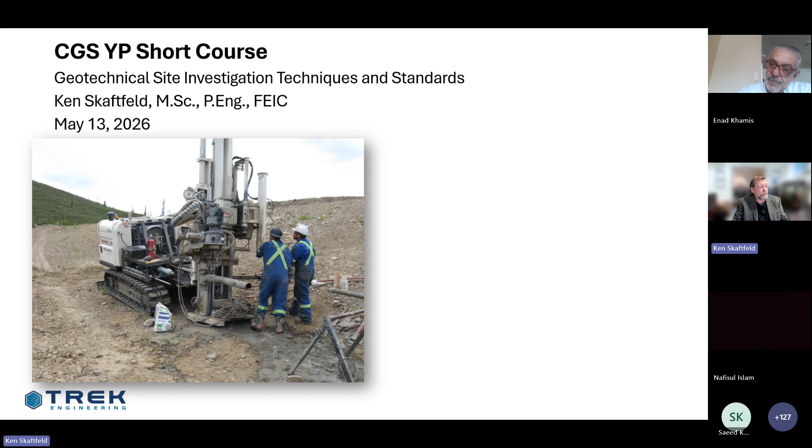Geotechnical site investigation techniques and standards. I'm not going to talk a lot about standards. We don't necessarily have a standard per se or a code that we follow in Canada, but we'll touch on some of the other codes that are applicable in terms of setting up a site investigation.

One important tool in your toolkit for a site investigation is a thermos with coffee, and then you always need an office chair. This is a picture taken somewhere in the high Arctic several years ago. The picture on the left is a sonic drill at a project up in the Yukon. And now my dad joke—I'll give you a chance to read that.

And I promise that's the last dad joke. There are no more.

So what is a site investigation? Really, it's an assessment of the engineering and physical properties of soil, rock, and let's not forget groundwater, because that's a super important part of a site investigation and design and construction for sure.

This is at a proposed construction site, or it could be a site where problems have impacted constructed works. An example would be the diversion channel that runs from the Assiniboine River to Lake Manitoba, where there was a lot of flood damage to some of the bridges. So this is an investigation that is being carried out.

This happens to be a track-mounted auger rig. We did the work to look at conditions relative to exposing the footing, or the pile cap I should say. You can see the steel H piles below the pile cap. We extended the pile cap down with concrete and then armored it. In some cases, additional piles were added to some of these bridges.

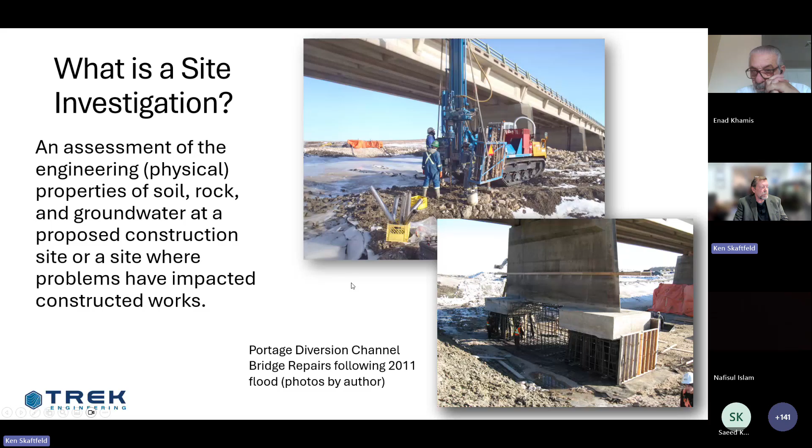So this is an example of a problem that has impacted constructed works. The general purpose really is to obtain geotechnical data or groundwater data on soil and rock strength, compressibility, permeability. Those are maybe some of the more important ones, but there's others.

We want to identify the presence of potential hazards such as landslides, expansive soils, etc. This is not a site investigation, but it's a picture of an unexploded ordnance and somebody sneaking up on this person in this picture. Sorry, that's my dad joke number 2.

So that is definitely going to be it. The primary purpose is to systematically assess, and systematically is an important term. You'll see further on, we want to get as much of a systematic process as possible.

So that's to assess subsurface conditions and guide us as to how we expect the ground to respond. And that would be the response under loading. Don't forget about unloading - rebound is something to think about in that particular case.

Environmental effects - there's numerous environmental effects that could include wetting, drying, especially in our region, and where Chelsea is in Saskatchewan, we have expansive clays. Then we also deal with freeze thaw in this part of the prairies.

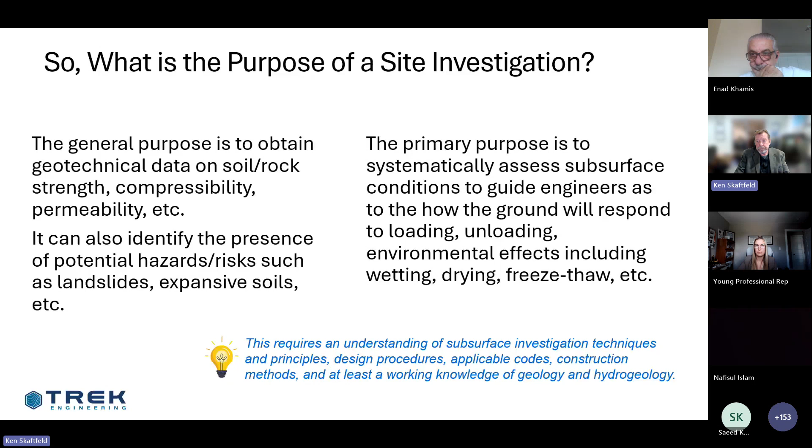So there are 2 basic approaches to collect data for design. This is a reference I've just shown here, the geotechnical investigation handbook, and it's also got a lot of design tables in it. So I'll leave that for you.

Some may have this on their shelf. The traditional approach to geotechnical site investigation is to consider ground conditions as a design element based on a structure or development design, or maybe a layout that's been given to you. So somebody says, this is what I want to build, and then you're going to plan your approach based on what's being built. That's probably the more common approach.

Having said that, and I'm not sure I like the term non-traditional, but it probably is in some respects, where we might want to plan the structure and development around the ground conditions. And so the ground conditions would be a design input, and the design is based on those conditions - that's maybe less common.

There's 3 basic steps involved in a site investigation, and there's obviously more steps, but this is what I consider perhaps to be the basic steps. You've got to determine the level of information required. In other words, what does this investigation look like?

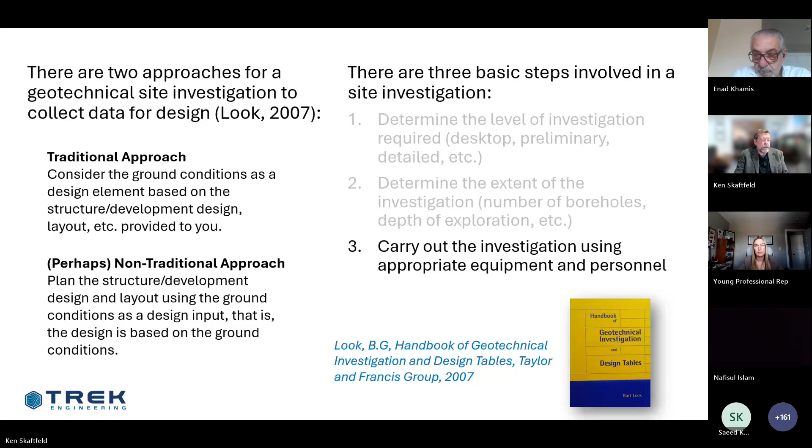Once you've gone through steps 1 and 2, you should have some idea of what the right equipment is. Like if you've got wet sand, drilling through 40 feet of wet sand, you're probably not going to have an auger rig, and so on. So you want to make sure you have the right equipment and also the right personnel.

So a fundamental consideration is what are the geotechnical design issues and what are the questions? Ask yourself, what are the loads? It's not unusual for us to ask a structural engineer, if they're looking for a geotechnical investigation for a building or a bridge, what are the ballpark loads on the foundations. We need to have some understanding of ultimate limit state and SLS values.

Long span length equals large loads. Quite often there's a lot of discussion relative to shorter spans versus longer spans, and the impact that will have on foundation loading. And therefore, that sometimes drives the type of investigation that's needed. Do we need to get into bedrock and this sort of thing?

Are there slope stability concerns? I would think in this picture, the answer is pretty obvious. Are retaining walls needed? Quite often there's geometric constraints that prevent the use of just earth embankments with 4 or 5 to 1 side slopes. This is an MSE wall in Saskatoon.

Will fill be placed for an approach embankment? If fill is being placed, what are the settlement tolerances? The reason I'm showing you this is so you start thinking, well, okay, if there's really strict settlement tolerances, you better get your investigation to look at the type of soils, the compressibility of the soils, and so on, and plan your lab testing program around that.

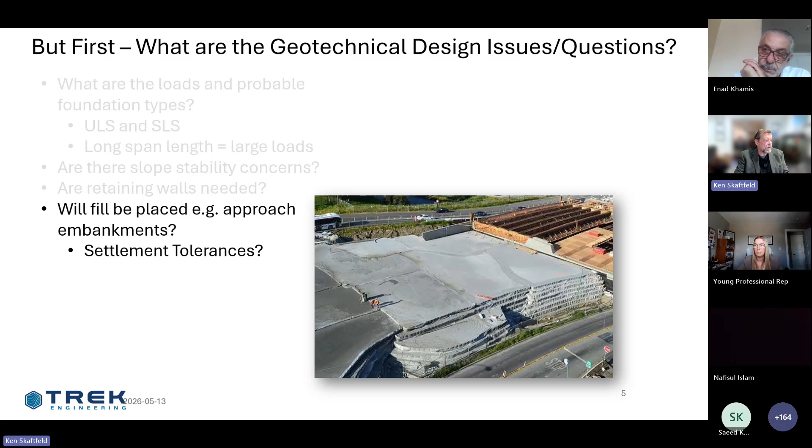Is there pile down drag? In a lot of cases, when there's an embankment and it's a short time frame to construction, quite often there's down drag loads on the piles that has to be accounted for. There may be frost heave, and don't forget groundwater. That's my main take-home message for today.

Don't forget groundwater. So what's the importance, in my mind, of a good site investigation? Almost everything, like all foundation elements and a lot of utilities, most utilities, lie in or on the ground. So we need to find something out about the ground.

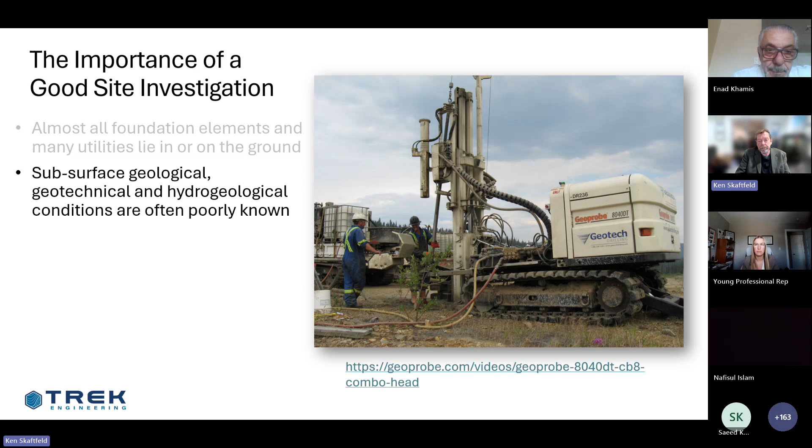Quite often, geological, geotechnical, hydrogeological conditions are often poorly known. We may not really have any information to go on. Sometimes we have some information. A very important step in all this is to obtain as much information ahead of time as you can when you're planning a site investigation.

Unknown or poorly known subsurface conditions represent the largest technical risk, and I can assure you, if it becomes a technical risk, there's probably a financial risk associated with that relative to claims and so forth. So that's what we deal with. An inadequate subsurface investigation is quite often the cause of a large claim or a large delay. If there's a large delay associated, say, with changed ground conditions, I can almost assure you it'll be followed by a rather large claim.

So what are the realities we work with? We deal with complex geological conditions that are hard to understand sometimes, difficult, challenging to model. There's quite often a complex response to loading or unloading, and that generally will depend on the stress level. In other words, how deep. We quite often have stress strain behavior that might not be linear, for instance, in a normally consolidated clay versus an over consolidated clay.

So these are the challenges that we're faced with. And then we need to look at the stress range that we're working with, the loads and so on.

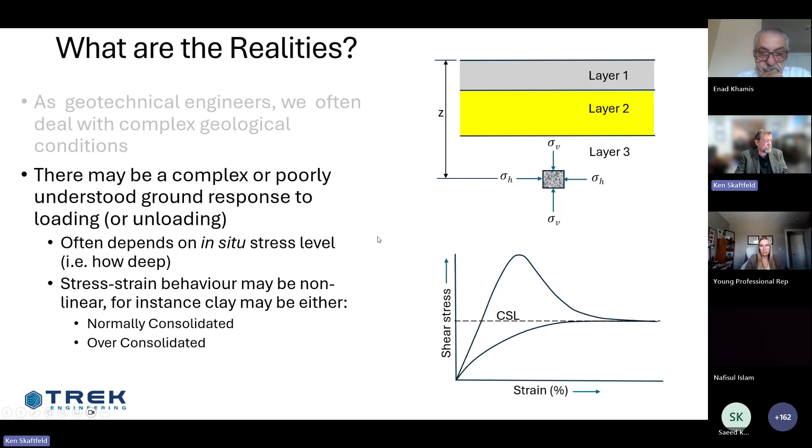Probably one of the first things to look at really closely is the classification of soil and rock. That's a really fundamental objective of a site investigation, is you've got to classify the soil and rock. To do this, you need to have a good understanding of soil and rock. And the Canadian Foundation Engineering Manual, the 5th edition, has adopted entirely the Unified Soil Classification System, or USCS, as outlined in the following 2 standards.

CFEM is not a code. It's a guideline document, but the USCS follows standards. The first one being ASTM D2487, and that's the standard practice for classification using USCS, and 2488 is the visual manual method.

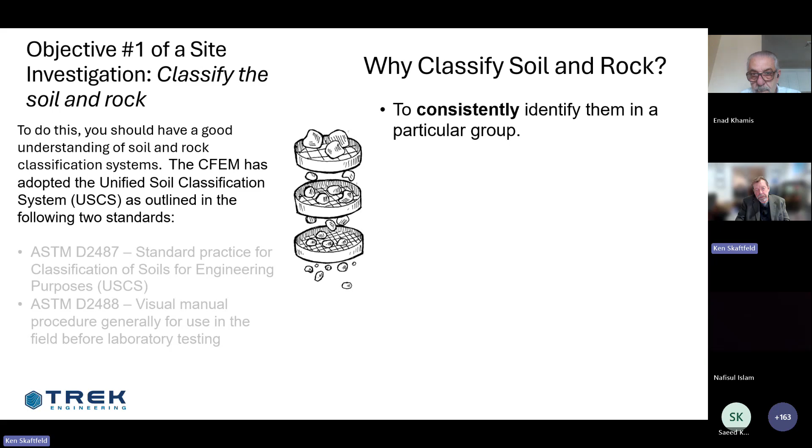Now, I'm sure most of you are aware of this, but just as a reminder, why would we classify soil and rock? To consistently identify them in a particular group, and we can all basically understand the same language if we do that. We want to specify a particular soil for an engineering application. Maybe you've got a liner and you need a highly plastic clay, so it's a CH, a well-graded gravel, GW for road, and so on.

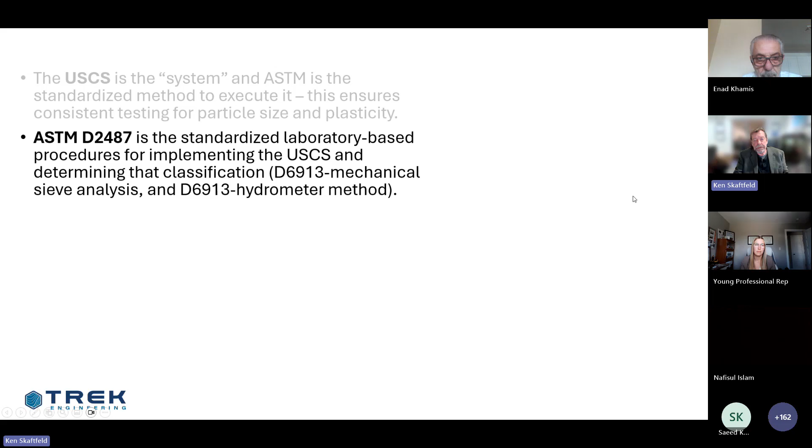Just to clarify one thing on USCS, that is the system. ASTM is the standard method to execute it, so the standards are part of ASTM. D2487 is one standardized procedure, which includes mechanical sieve and hydrometer analysis, and this gives us consistent testing to classify based on grain size and plasticity. 2488 is the visual manual method.

This relies on manual tests in the field, more for the field, right? So this is part of your site investigation, and we record those classifications on field logs as a preliminary assessment. Quite often that's followed up by lab testing in accordance with ASTM. So a site investigation should consider the testing requirements needed to properly classify the soil. That's changed a little over the years, but you should be aware of what sampling and testing is needed when laying out the program and identifying the laboratory testing program.

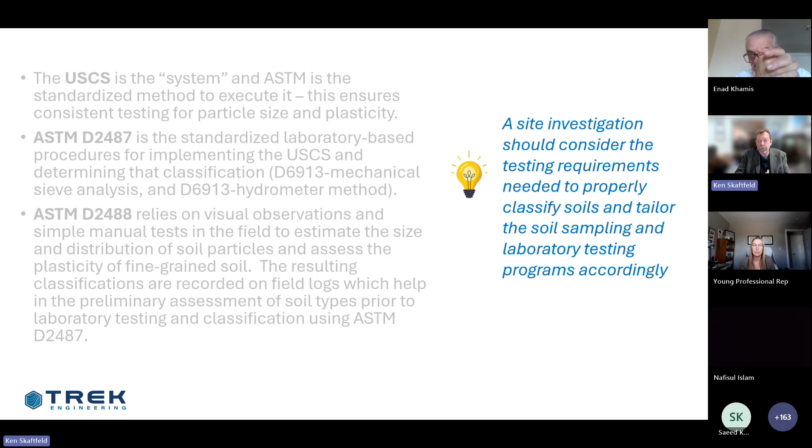I'm not going to spend a lot of time talking about rocks other than to say, if you're dealing with bedrock, rock needs to be classified. This is pretty basic stuff. We've got igneous rock, we've got sedimentary rock, and we've got metamorphic rock.

Some people attending today have a geological background. So I'm just going to say, if I have my toolbox and I need to look at some rock more closely, chances are I'm going to bring some back for a more complete classification.

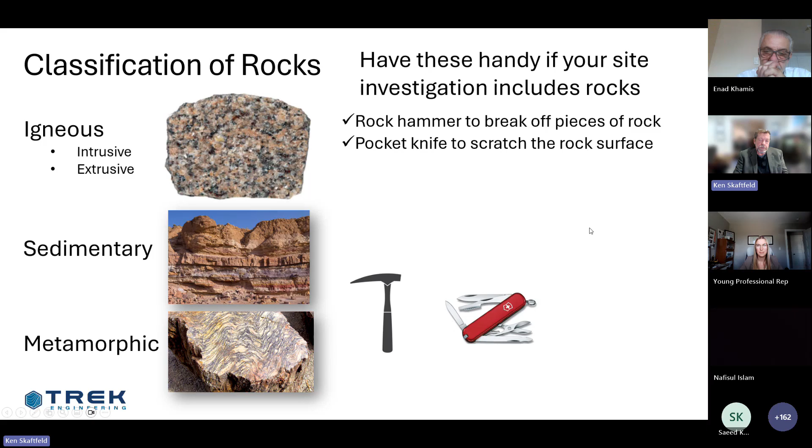But you'd want to have a rock hammer, to break off a piece of rock, a pocket knife to scratch the surface—this goes to the Mohs hardness scale—a hand lens to look at the crystal, just to see whether it's coarse or fine grained, a dropper bottle with diluted hydrochloric acid to test for carbonates, and a paintbrush. It's always good to wet the rock sample if you want a better look at it.

Objective 2: determine the physical properties. This will help assess the suitability of the soil or rock for construction. This is how I like to look at soil: we have index properties, which are specific gravity, water content or moisture content, particle size, density, plasticity. Then we have engineering properties: permeability, shear strength, and compressibility. Those, in my mind, are the engineering properties.

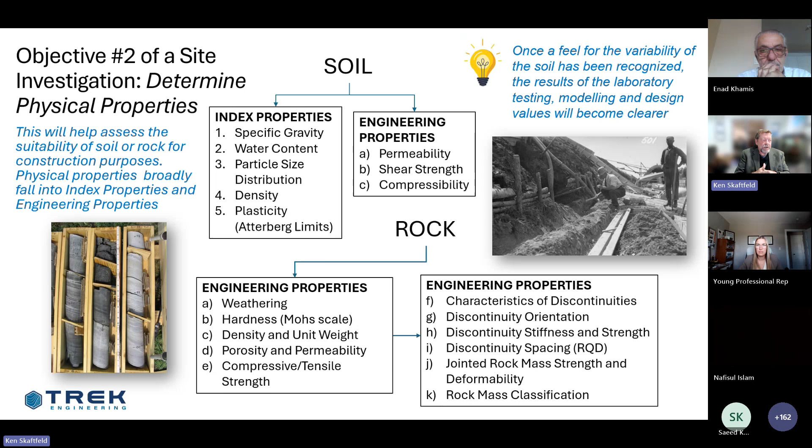Rock mostly just has a bunch of engineering properties, and you're going to hear more about this in another presentation, so I don't want to spend a lot of time, but weathering and joint discontinuities and so on. Once you have a feel for the variability of the soil, then the results of the laboratory testing, modeling, and design values should become clear to you.

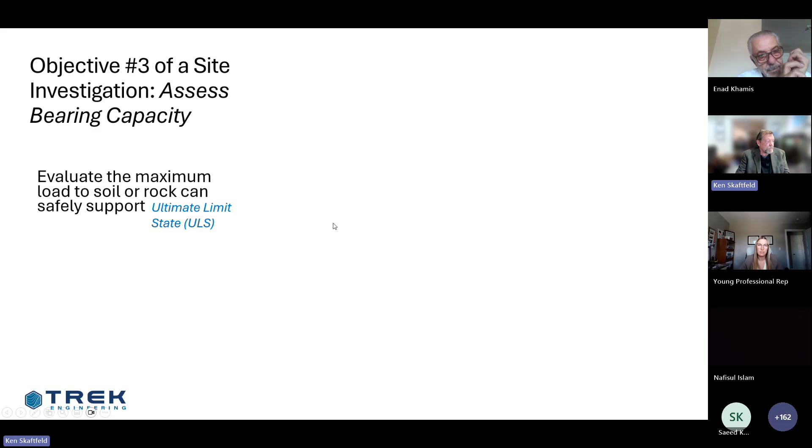Objective 3: assess bearing capacity. Evaluate the maximum load a soil or rock can safely support—that's the ultimate limit state. And also without excessive deformation, informing about the type and size of foundation units, which is the serviceability limit state. I don't want to get bogged down in limit states design here, but just a few things.

When we look at a footing, as the footing width increases, the behavior in both SLS and ULS limit states changes, right? So quite often we look at different footing widths and try to find a balance between strength and serviceability as much as possible. Sometimes we start with a footing size based on serviceability, especially in really soft or loose soil, because generally speaking, once serviceability criteria have been met, ULS requirements are probably satisfied.

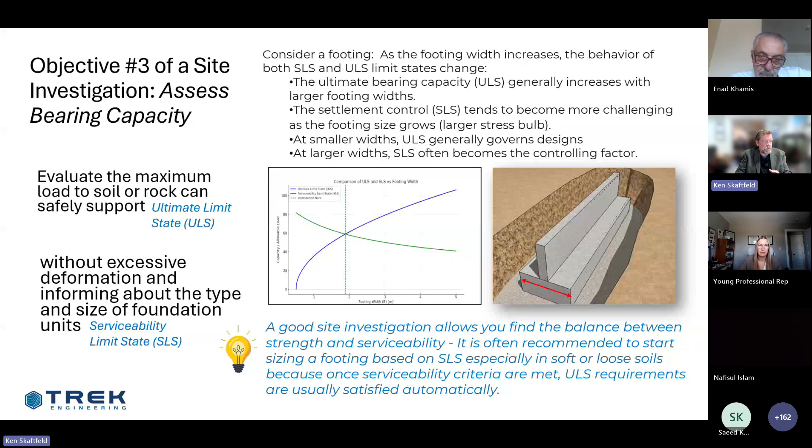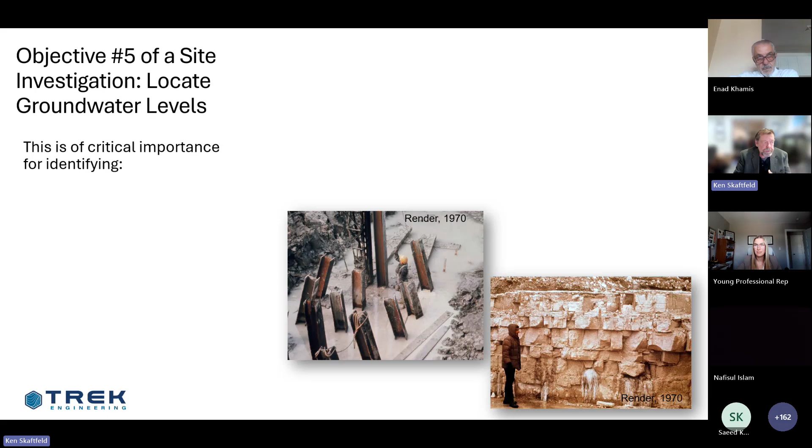Objective 5 would be locate groundwater levels. This is of critical importance in order that you can get the information that you need to look at dewatering strategies. And that might be like here's showing a shored excavation sheet pile. Top left picture is a sheet pile supported excavation. There's a pump, there's dewatering going on, and so on. Sometimes dewatering wells are installed outside of the excavation to lower the groundwater levels and so on.

This is a picture from one of the floodway bridges built back in the 1960s, just outside, just east of the city here in Winnipeg. And Frank Render, who was our groundwater guru for many, many years, Frank passed away. But this shows an excavation for a pile cap, steel H piles. This is not like surface water going into the excavation. This is groundwater that's coming up around the piles. There was very little clay left. The piles went down into till, which is common here, and all kinds of groundwater seepage into the excavation.

So this is another excavation on the south end of town, just showing what the rock looks like, the jointing and so on. This is a limestone bedrock, and these are some of the challenges that we're faced with. So it's also really important identifying groundwater levels for foundation design, assessing buoyancy potential, groundwater contamination. So it is, and by it I mean groundwater, is sure to play a very important role.

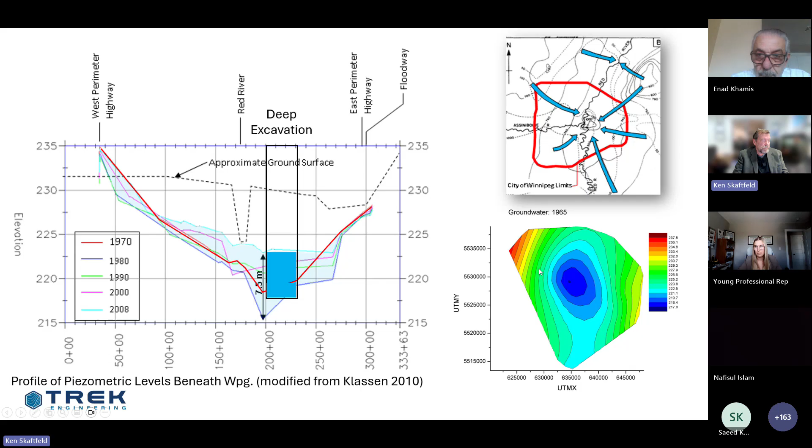If you look at that in terms of, this is work by Klassen in 2010, these are groundwater contours, red being a higher elevation, blue being the drawdown cone right here. That's shown in the blue here. If you look at it in time lapse, you'll see that the dates, it's a little bit faster than I like, but anyway, you can see that blue area just basically disappearing. So you can see kind of the two-dimensional effects.

Objective 6, to guide foundation design. So identify the information necessary to select a cost-effective foundation type. And you want to provide data for the design of the foundation system based on the anticipated loads. And that could be a shallow foundation, deep foundation, raft, and so on. Many different types of foundations.

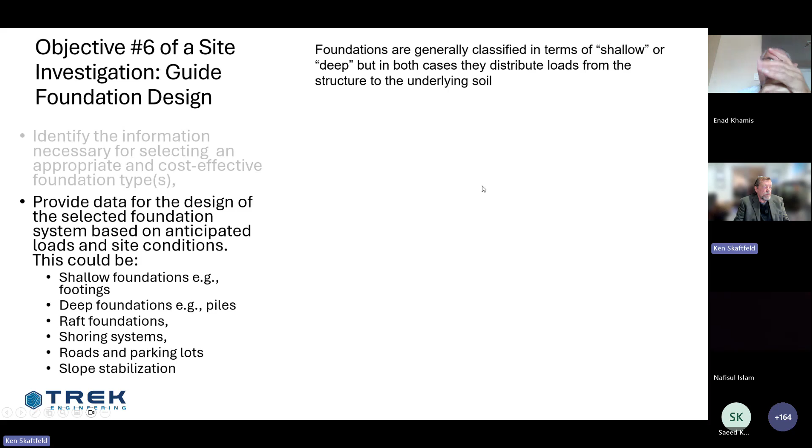We generally classify foundations in terms of either being shallow or deep, but in both cases, they transfer load down onto the soil. Shallow foundations, there's general kind of rules of thumb in terms of what defines a shallow foundation based on the depth and the width. And these are some different types of shallow foundations. Whereas a deep foundation, it's when the depth of the foundation is really large in comparison to the width. Think of it that way. And that could include belled piles, cast in place, concrete piles, driven steel pipe piles in the bottom right.

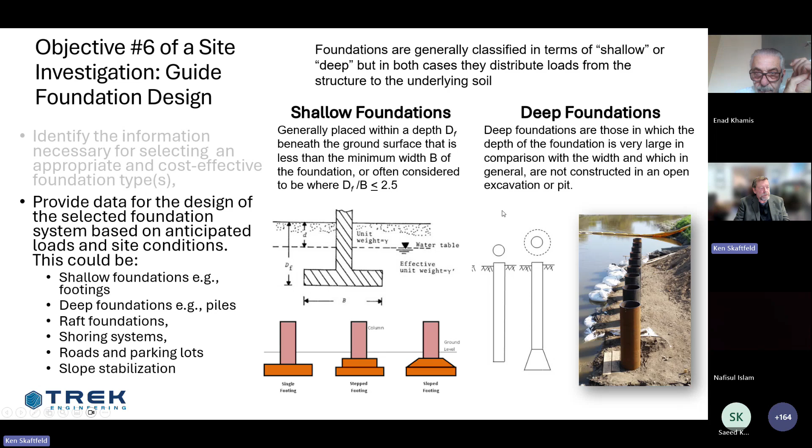Could be an excavation, or a secant or tangent pile wall, which are very similar. In a tangent pile wall, the individual piles just touch each other, whereas in a secant pile wall, they bite into each other. For a site investigation on something like this, you need test holes deep enough to reach refusal or a sufficient depth for design.

You need to know something about the undrained shear strength of the clay for design, unit weight, groundwater level, friction angle if it's granular, modulus values, and so on.

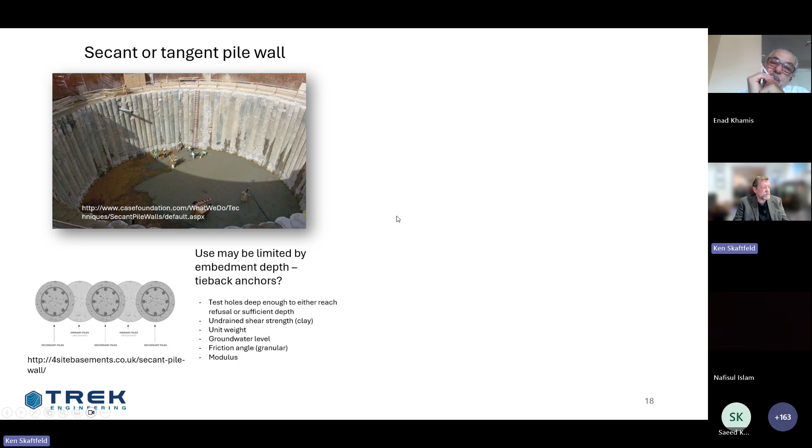Seventh objective: optimize construction methods. We need to look at different excavation types and techniques. You need earth pressure coefficients for retaining structures, and you need to determine safe excavation side slopes, and so on.

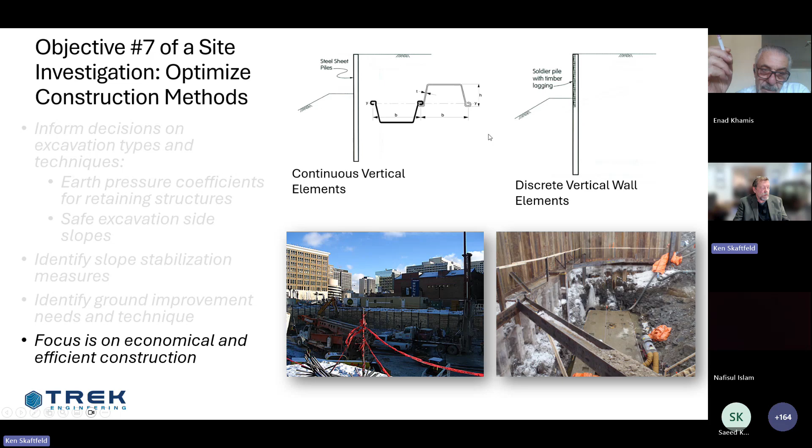This is just a typical soldier pile shoring system in Winnipeg. This is a deep excavation into shale, and you can see the amount of bracing and whatnot that is required. It's a pretty big difference between the two, but nonetheless, you need to obtain the information necessary, in most cases, for the structural engineer to design the system.

You need to ensure regulatory compliance. That might mean providing documentation for local, provincial, and federal building codes. You may need to demonstrate this through an assurance letter or something similar, showing that the project design recommendations are based on sound principles and meet safety standards, for example, in seismic design.

We deal with the National Building Code of Canada, NBCC, which I think everybody would be familiar with. We also deal with the Canadian Highway Bridge Design Code, CHBDC. There are some differences, and I don't want to get bogged down since I think this is coming up in another presentation.

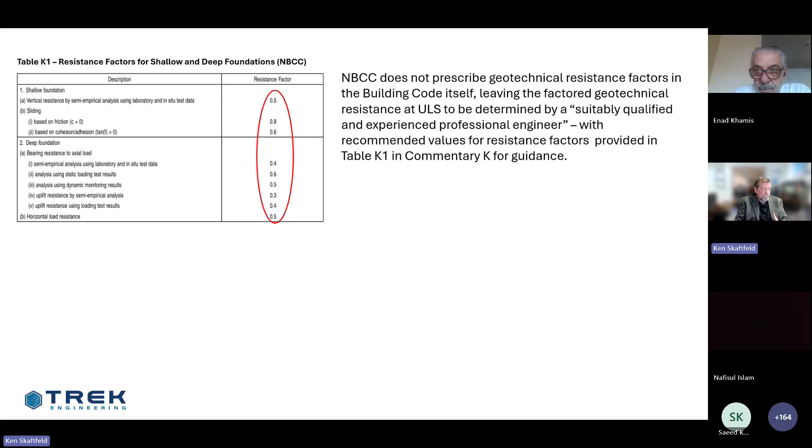So NBCC does not prescribe geotechnical resistance factors in the code itself; that's left up to determination by a suitably qualified engineer. Recommended values are provided in Commentary K, which is linked to the code. CHBDC gives us the ability to pick a resistance factor based on our understanding of conditions.

This is a really important point because the resistance factor accounts for uncertainty, and it depends on the degree of site and prediction model understanding. So if you want a high degree of understanding and take advantage of a higher resistance factor, you better make sure you have the right information. Your site investigation is tailored around that.

There's real economic value in many cases to having a resistance factor that can be adjusted. Sometimes on a job with many piles, it may be worth going the extra step to get that level of understanding that a good site investigation will provide. That could mean static load testing, or Osterberg load testing, or something like that.

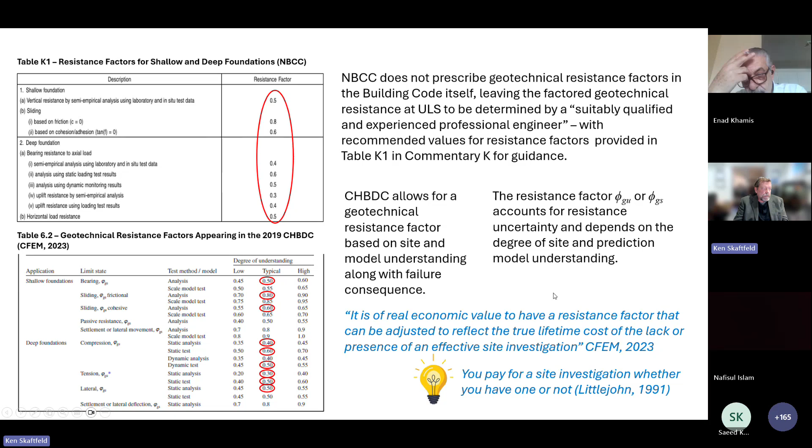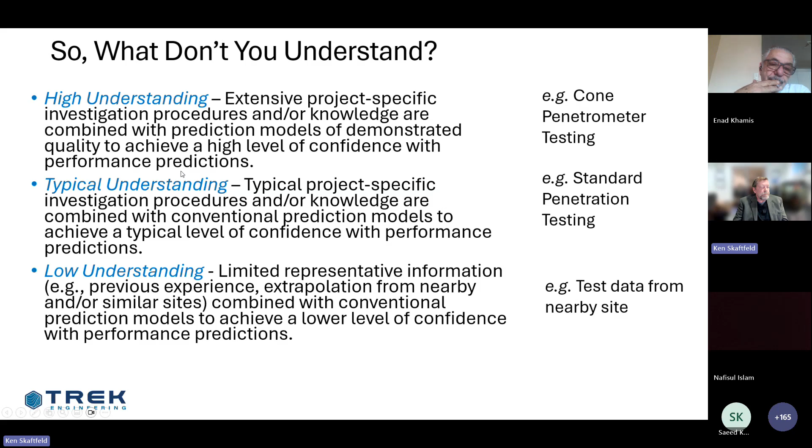Going back to CHBDC, a high understanding might mean CPT testing, and a typical understanding, I'm just throwing this out as an example of what a level of investigation might include. A low understanding might mean you've got a site a block away and you're taking information from that site. So this scales up or down according to your level of understanding, and the resistance factor is tied to this.

So what do you need to know to plan and implement this site investigation? Is it conceptual, feasibility, preliminary, detailed, or design? Sometimes there's a bit of overlap between these. They're not necessarily in a box to themselves.

Sometimes we carry out a detailed investigation, a level sufficient for detailed design, as part of preliminary design, because it's maybe not cost effective to go back in for a second round. Maybe it's a very remote site and expensive to mobilize.

So sometimes these overlap. You've got to ask yourself again about loads and allowable differential settlements. It's not just settlement. So when you're looking at oedometer results and consolidation settlement, it goes way beyond just the settlement magnitude.

You really need to consider what the differential settlement is potentially going to be, what information is available for the site, how many boreholes you need, and where those boreholes will be located, within or outside of the footprint. Sometimes there's a building on the site and you can't get to where you might want to get to, so you have to plan around what's there.

There's physical constraints. What are the sampling requirements, disturbed and undisturbed? Think of undisturbed, and I would put relatively undisturbed samples, that being, say, Shelby tube samples. Should in situ tests be done?

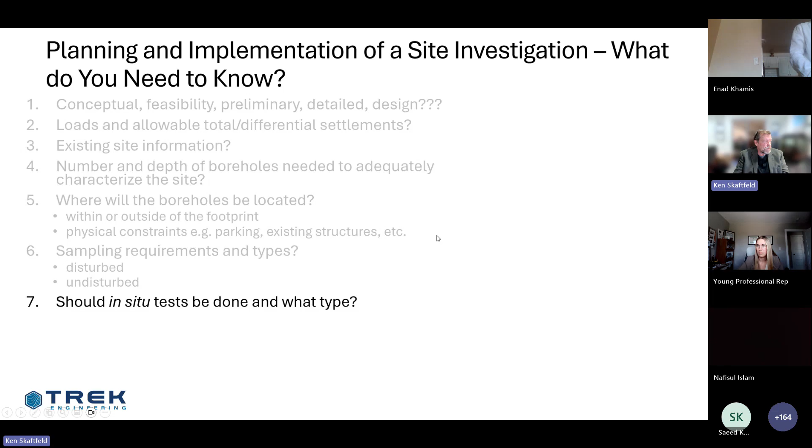Dr. Robertson in the next presentation will be going into a lot more depth on in situ testing. Is instrumentation needed, and what does that look like?

Do you hook it up to a data logger? Do you just go out and do manual readings? How do you protect that during construction? Maybe it's really important to maintain the instrumentation, like an inclinometer casing, during construction - then you better put it somewhere where it's not going to get taken out during construction.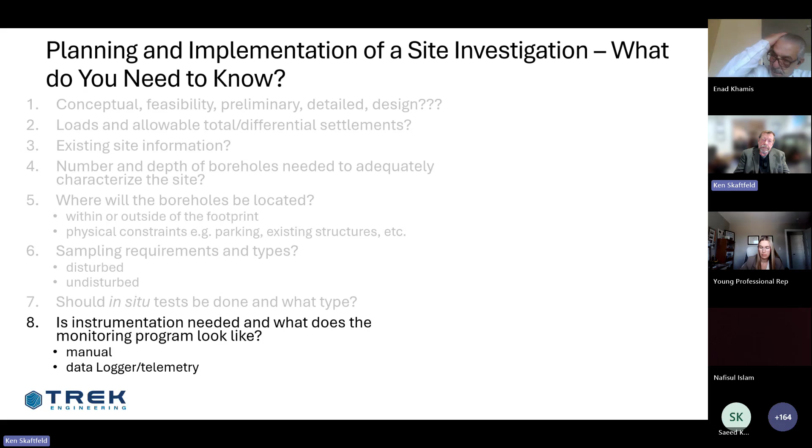So your site investigation should plan around what's being built, and if you've got instrumentation, try and put it in an area and location that's least likely to be damaged or disturbed. So there's a lot of stuff to think about, right?

I put this together, and I'm sure if you threw this out to 10 different geotechnical engineers, you might get different answers - how we seem to all kind of gravitate towards flowcharts.

This is my own flowchart, starting with a preliminary investigation and what that might mean relative to getting to preliminary design. And after preliminary design, do you have sufficient information? Yes or no? If you don't, then you might have to go back around and drill more holes, more test pits, and so on.

So it's just a way to logically think your way through this, right? So we'll go back up to the top. Your preliminary investigation involves collecting some initial information. You'll have a site reconnaissance and public records maybe, and you're going to characterize that, and then get into the preliminary design, which involves drilling and so on.

Along the way, there'll be some technical review, and that's probably going to direct you on one path or the other. So I don't want to get too bogged down in this, other than to say, give some thought as to what the typical investigation should look like relative to the project you're working on, and whether it's preliminary, detailed, or conceptual.

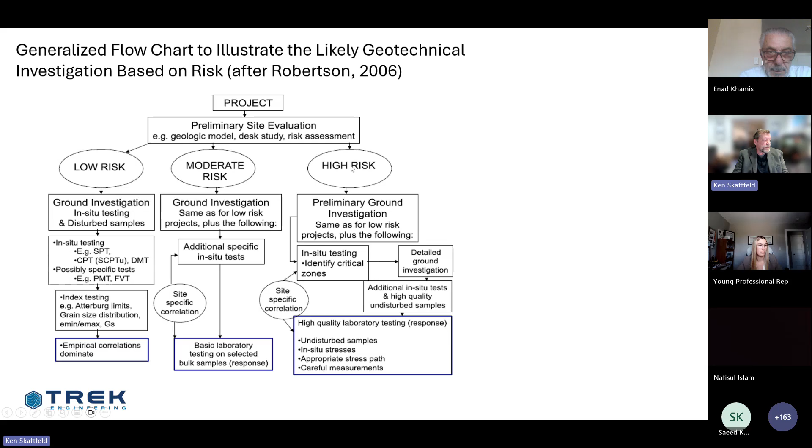This is probably going to be covered - I'm sure I saw it in one of the other presentations - so I don't want to spend a lot of time, other than you should be aware of that. It's also in Chapter 5, Site Investigations, in the Foundation Manual, and the author is Dr. Dave Elwood.

This, I'm not saying you could find, because I might have the only copy. It's a short course on site characterization put on by Wayne Clifton and Dr. Robertson back in, can't make that out, 19-something. So it's a great publication that put together lots of interesting papers, lots of good resource material. If you can get your hands on a copy, I'd suggest you do so.

Geotechnical data and baseline reports - I want to touch on this quickly. A GDR is a data report. There's a GDR, D as in David, and a GBR, B as in Bob, and the GDR represents a general description of conditions and information collected. That's all it is. But more importantly, a geotechnical baseline report - you're going to be hearing about these, you're probably going to run into them, you're probably going to be involved in one.

The intent of a GBR, especially for linear infrastructure like tunnels, is to establish baselines that you can measure that describe the ground conditions and behavior you expect to encounter. A classic example is obstructions in tunneling - cobbles, boulders, that sort of thing. The GBR is really essential for allocating risk and developing scope, and as part of contract administration.

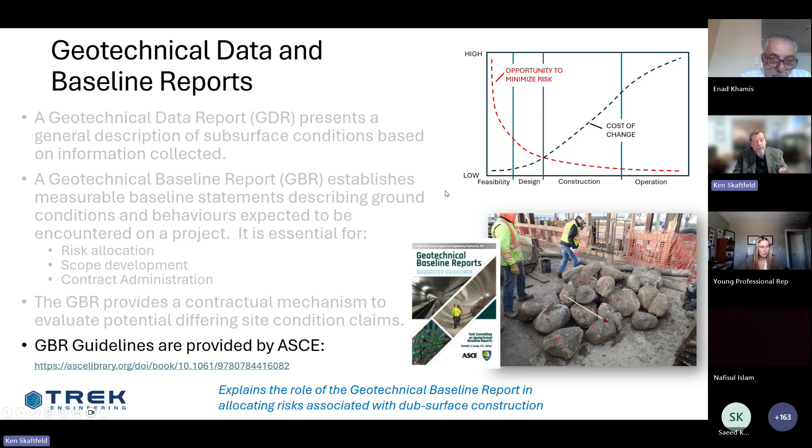There's a picture from a tunneling job showing what tunnel boring machines don't like to run into. There is a document by ASCE on geotechnical baseline reports you might want to be aware of, and that describes basically what I just covered.

Expenditure for a site investigation - the typical expenditure may range, and I'm just throwing some numbers out, like that flow chart, you ask 10 people you'll get 10 different numbers. Let's say, for argument's sake, 0.1 to 1% of the construction cost, maybe more if it's complex, and the minimum may be something like 0.2 to 0.5%. Some may say the cost of an investigation has decreased over the years as awards may be based on lowest cost and fastest results. That's the reality of the world we live in.

An interesting paper by Littlejohn shows different consumers and what they thought the cost of a site investigation was relative to what it actually cost as a percentage of capital expenditure. I'm not picking on anybody, but architects, for instance, thought the site investigation was maybe 0.29%, whereas the actual expenditure was 0.14%. Civil engineers looked at it differently - they expected the cost to be 1.94%, whereas it turned out to be 0.29%. It's an interesting thing to look at relative to expectations, I guess.

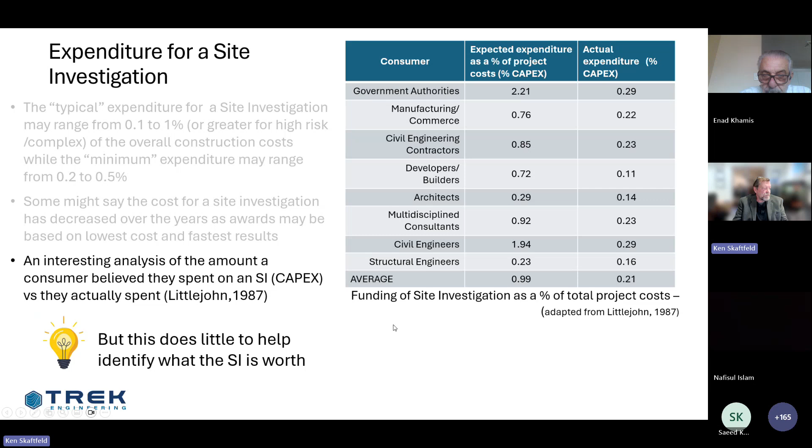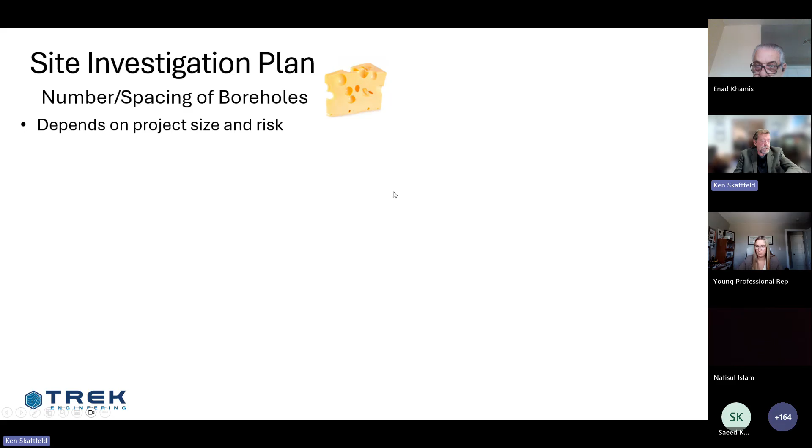Chelsea, how am I doing for time? You're doing good, you're at 40 minutes. 40 minutes, so at top of the hour? You got it. Okay, I should be good.

Another example for planning a site investigation - we quite often look at LiDAR. It's such a valuable tool, and LiDAR and drone surveys go hand in hand now. This is a river, the Red River in Winnipeg, and this is the North Kildonan Bridge.

Based on elevation, brown being higher elevation, green being lower, you can see this ground is higher by a couple of meters. That's because this is lacustrine, the original lake bed, Lake Agassiz clay. There's been a lot of erosion, and on the inside bend that's where deposition is taking place. That's why the elevation is lower, because it's a floodplain, and the soil ground elevation really only gets to where the water gets to, because it's a depositional material.

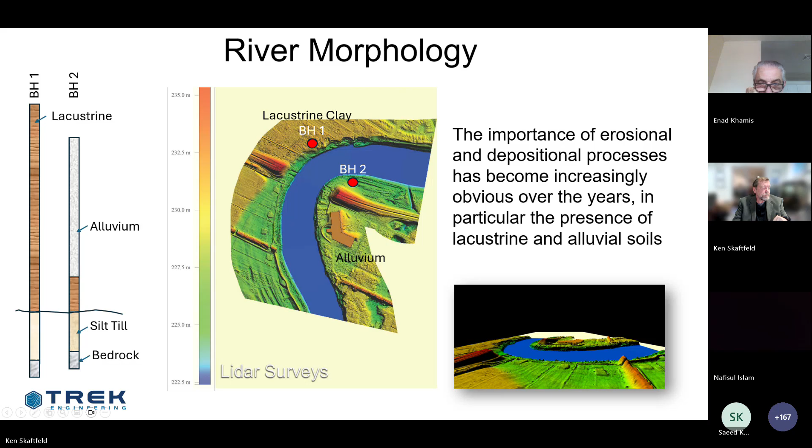If you look at a cross section, here's the lacustrine clay. This is on the inside bend where alluvium has been deposited. We call this an erosion controlled bank. Here it's failure controlled, because the lacustrine soils are weaker and tend to fail with deep-seated failures. We have till with some boulders, and we have limestone bedrock. Maybe you have a high rise here and a building here.

So start thinking about that site investigation. What do you need to find out? Well, on this side of the river, it's probably below flood protection level, so you're going to need maybe a dike. That dike, you're going to have to start looking at stability of this alluvium, so you need information on that. You'll need information on the shear strength properties of the lacustrine clay for sure.

And you've got a high-rise building, so this borehole probably goes down into rock to get enough information for deep foundations. These loads can be substantial, and quite often we use rock-socketed caissons. So you need information on the bedrock, and your investigation needs to go down into bedrock. Because we no longer go down and inspect those holes, our site investigation has to obtain enough information beyond the length of socket that we anticipate. Then we can look at what socket length is needed based on what we find in the coring, whereas we used to go down and core the bottom of the caissons to make sure we had good rock for some distance below.

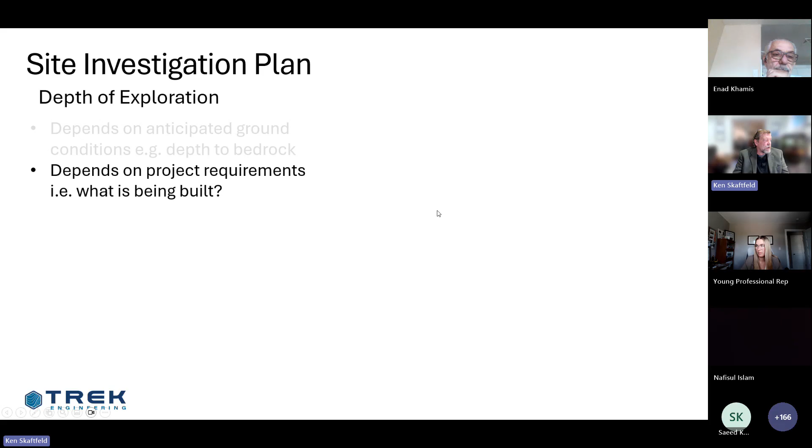This test hole here, smaller building, maybe the important thing becomes seepage and whatnot. Maybe that's something permeability testing or a test like that to look at potential seepage paths underneath the dike and so on. So depth of exploration depends on ground conditions, depth of bedrock, and what's being built.

If you look at stress bulbs, that's a good way to figure out how deep you need to drill based on Boussinesq stress bulbs. Lightly loaded structure, 2 to 6 times the probable footing width, and so on. So there's some general guidelines you can use.

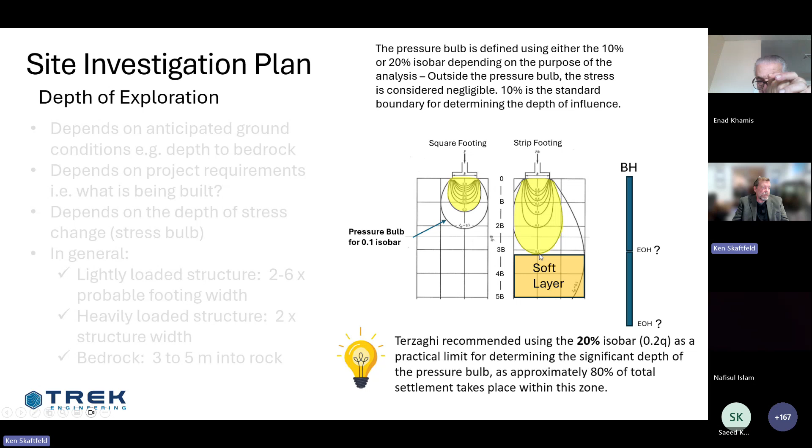Keep in mind the 10% or the 20% isobar, which is basically 10% of the loading, is how the stresses are being distributed. Outside the stress bulb, we consider the stress change to be negligible in terms of settlement. 10% is quite often a standard boundary, whereas Terzaghi recommended 20%, which is greater. But if you only think of it as 10% and there's a soft layer down below, you've got to start thinking maybe you need to take this hole a little bit deeper, because depending on the difference between 10% and 20%, you could still be stressing that soft soil, and that could result in more settlement than you expect.

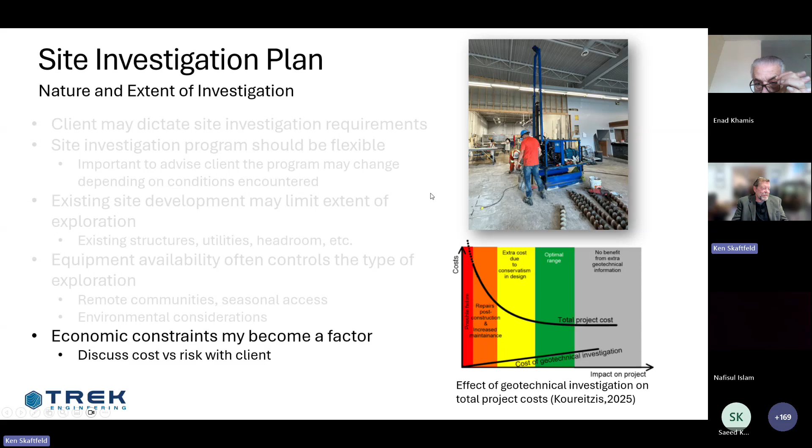I'm just going to fly through this, looking at different drilling and sampling methods. Mud and air rotary is good for all soil and rock types, though sampling is a bit of a problem. You can go deep with this type of drill, and it's portable - you can take it in with a helicopter.

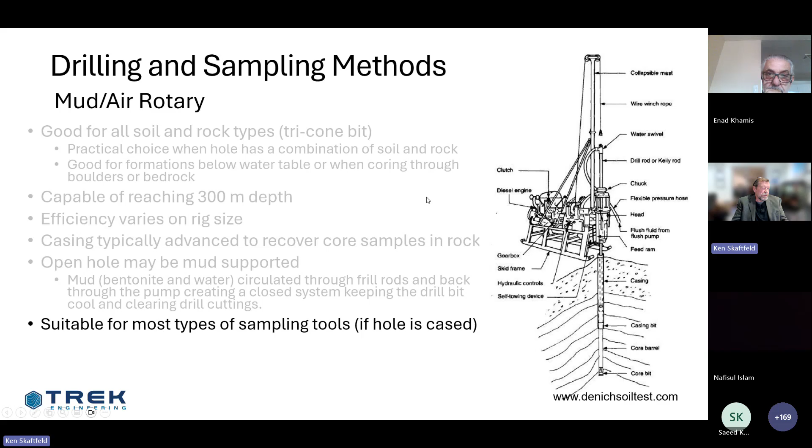So this is one type of drill rig available that will go through just about anything.

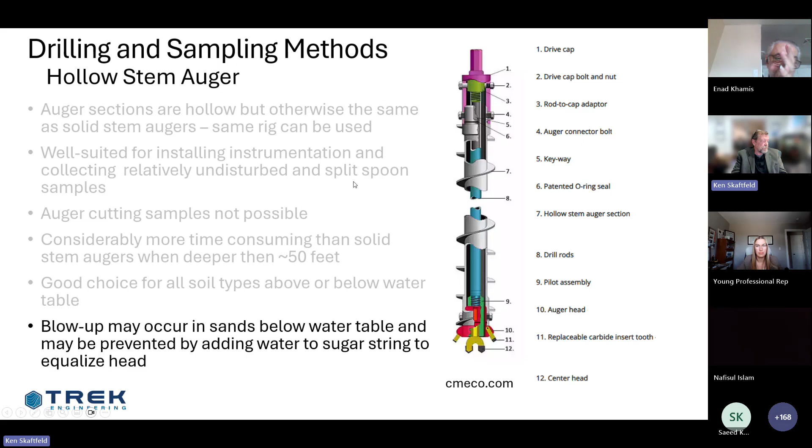Then we have hollow stem augers. Same rig, you're just switching over to a hollow stem auger, so the auger becomes the casing, and you drop your sampling devices down inside it. It gets really expensive beyond 50 feet - exponentially more expensive the deeper you go. But it's a great choice for soils both below and above the water table.

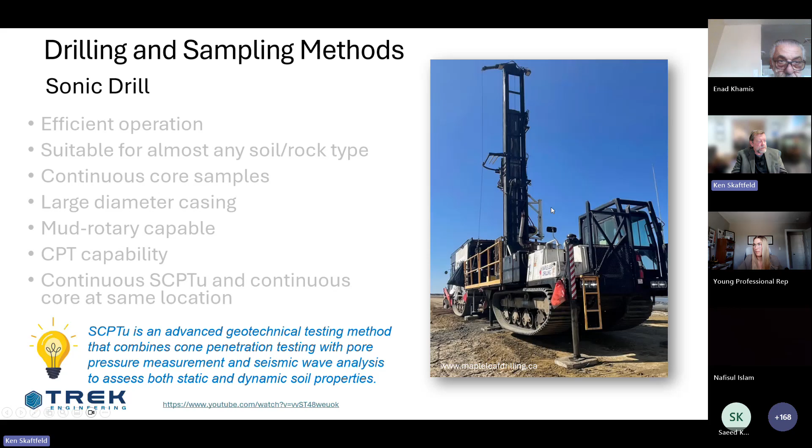The sonic drill, based on the name, has a sonic percussion system. It's efficient and suitable for most soil and rock types. You can get continuous core samples, large diameter casing, and it has CPT cone penetrometer capability. This is more and more common now - a lot of this is Maple Leaf Drilling in Manitoba here, the sonic drill.

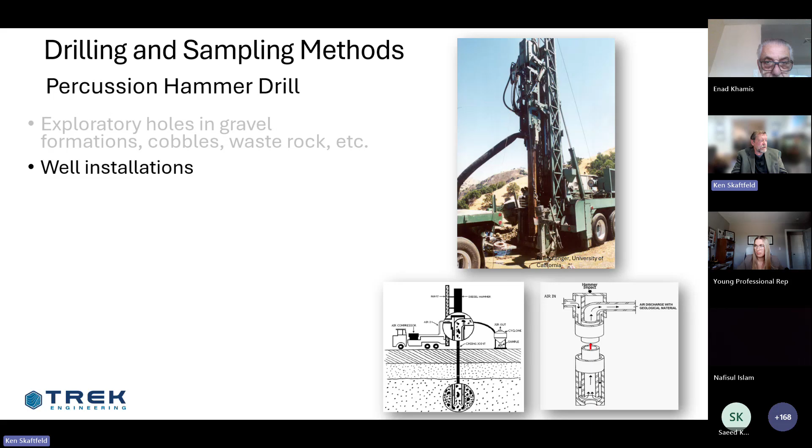Percussion hammer drill, like a Becker hammer, isn't all that common for site investigations, but it'll go through things like waste rock in a mine. Sampling is so-so.

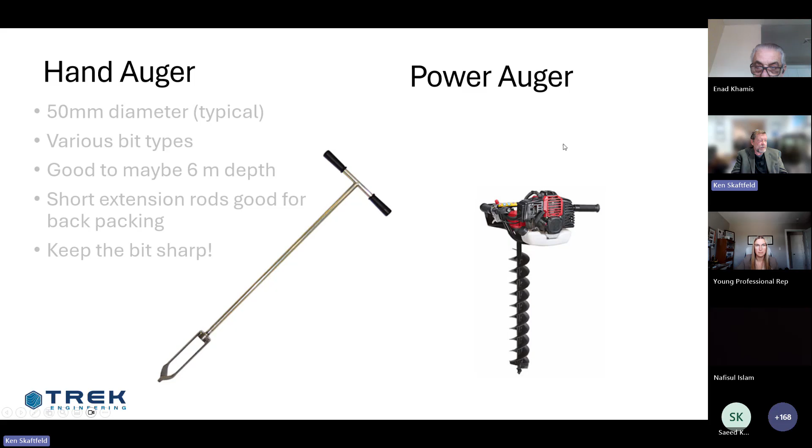Don't forget the hand auger - it is useful sometimes, you can go 10 or 20 feet if you're ambitious enough, with different bit types. Power auger - this is something you want to be very careful of. If that auger bites in the ground, you'll be spinning around like a top.

In situ testing - Peter's going to talk on this shortly, so I don't want to take any time. It lets you evaluate soil in its natural and undisturbed state, that's the beauty of it. It will largely, not completely, eliminate sample disturbance, particularly in cohesionless soil. It's good for looking at layers that might be missed if you're sampling every 5 feet or so.

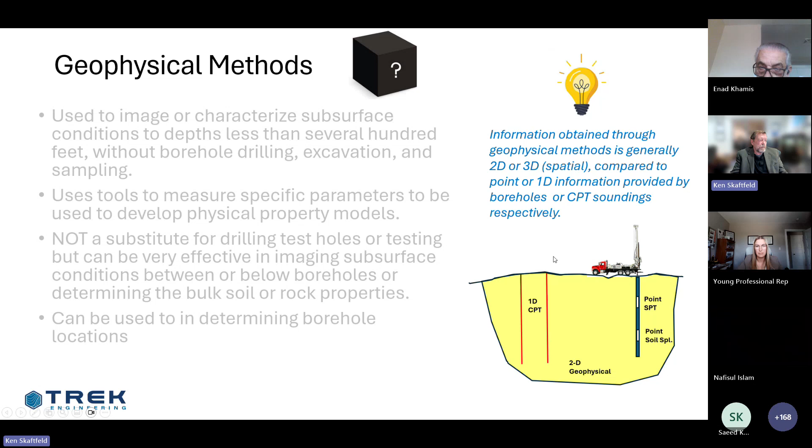Geophysical methods, I'm going to go through this quickly, just to make you aware that there are geophysical tools and methods out there that can greatly help in a site investigation compared to, say, a one-dimensional information provided by a CPT. With geophysical methods you get more of a two-dimensional picture, and there's a number of different methods out there.

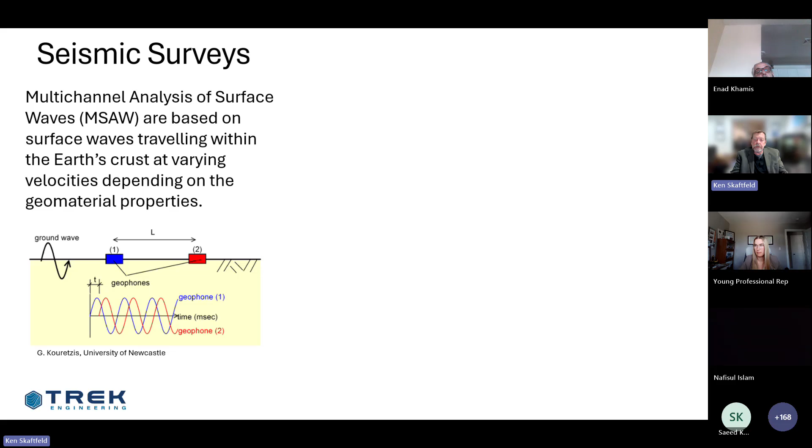So there's seismic surveys, there's electrical resistivity. Chelsea, I don't know if anybody's covering geophysics or not, but just so you know what's out there - ground penetrating radar, I'm sure everybody's heard of. Quite often used nowadays to look at the permafrost table and depth of thaw.

This is an example of some work I was involved in, looking at deteriorated concrete in a concrete pipe. We used something called impulse radar scans to identify sections of pipe with sulfate attack.

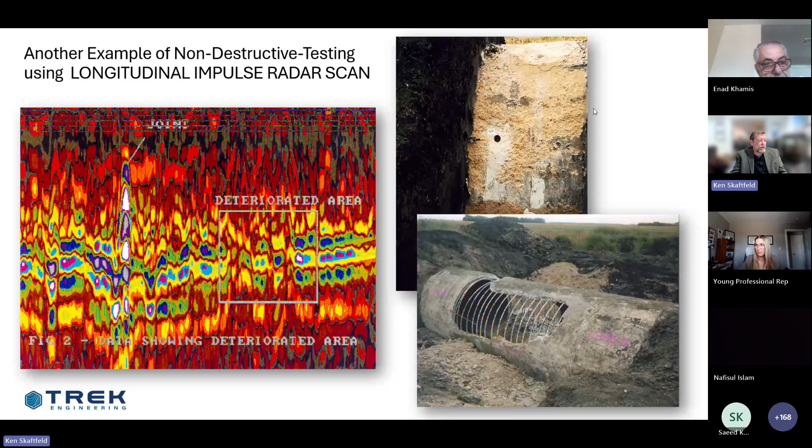We bought it, can't remember exactly where, somewhere in the Eastern Arctic. Anyway, he had an absolutely amazing presentation on site characterization - super interesting projects he was involved in, most notably the Chicago Tunnel.

Peck developed a relationship between initial void ratio and compression index, just to give you an example of how important and detailed these investigations should be. Do not underestimate the value of moisture content. I was told that when I first started, and I appreciated it more throughout my career. The moisture content profile can tell you an awful lot about what's going on in the soil.

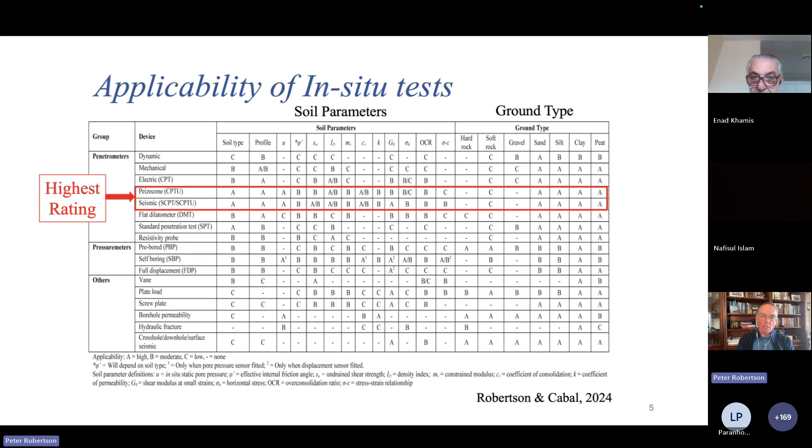So let's quickly go through the major tests. The standard penetration test has been around a long time, over 100 years. The advantage is it's very simple, rugged equipment, relatively low cost, and available throughout North America and most parts of the world. And you do get a soil sample—disturbed, but you do get to see what the soil looks like.

The limitations are that the sample is disturbed, so it's for index testing only. There's high variability and uncertainty, coming from exactly how you made the borehole, where the water was in the borehole, and what type of hammer anvil system you used. The biggest factor is the variability in energy from the hammer anvil system. It's a pretty crude number—you just get a single value, the blow count, to penetrate the sampler a foot. And of course it's discontinuous; typically you run the test every 5 feet or 1.5 meters, so if you do a 30-meter sounding, you only get about 20 blow counts.

When you process the data, it's common now that you normalize it to an overburden pressure of 1 atmosphere—that's the N1—and it's common practice to correct it to a 60% energy. That 60% energy comes from the fact that a lot of the historical data and empirical correlations were based on data where the average energy was typically around 60%. Nowadays, with modern automatic hammers, often the average energy is up around 80%. So generally you're measuring lower blow counts than historically, and you need to correct it to that energy.

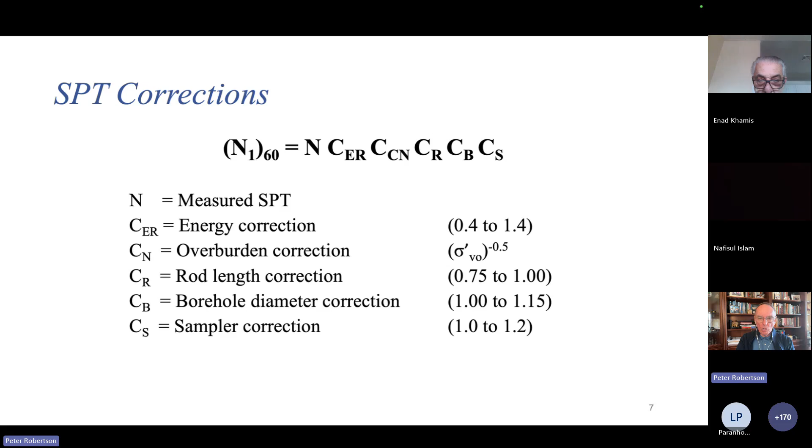Not all samplers are exactly the same. They can have a liner or not a liner, etc. So there are these corrections.

In simple terms, you may measure a blow count of 12, but if you were using a very old system like a rope and cathead system that could have an energy of only 40%, then the N60 gets corrected down to 8. Now, if you've got a modern automatic safety hammer, it could be operating around 80%, which means the N60 is 16.

At shallow depth, the energy can be even lower. For a rope and cathead type system at shallow depth, it could be as low as 20%, so it could be as low as 4. So the real blow count is somewhere between 4 and 16, and you measured 12. You're not actually quite sure exactly what this blow count is unless you measure the energy or have a calibrated system where you have some sense of the average energy. But even then, it will vary a lot, so there's a lot of uncertainty.

I'm just going to touch briefly on the flat plate dilatometer. It is a relatively popular test, developed by Professor Silvano Marchetti in Italy. When I lived in Italy for a year and a half, Silvano and I became very good friends.

The advantage is it was a very simple and rugged piece of equipment. It's a flat blade, you can see a picture on the side. It's a flat plate with a circular membrane, a stainless steel membrane, and there's a little air tube that goes down, and you inflate this membrane.

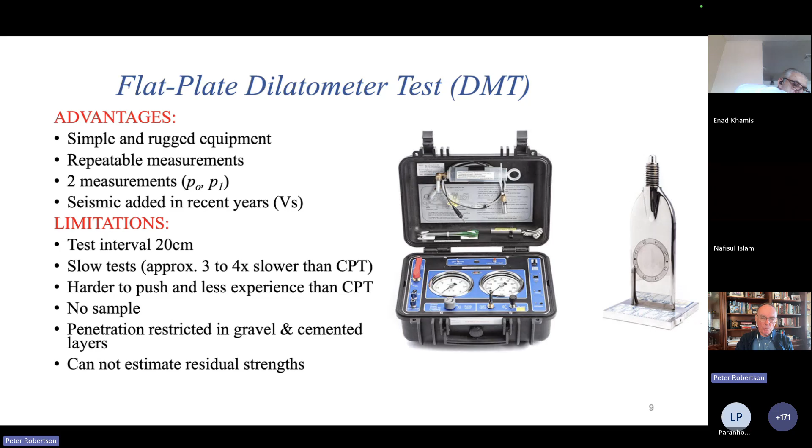So if you have a given reaction, a given piece of equipment, you're not going to push this as deep as the CPT. And of course, you don't get a sample, and penetration is restricted in gravels, cemented layers and rock, etc. It gives you a lot of parameters, but it will not give you residual strength, so if you want the residual remolded strength of a soil, this is not going to give it to you.

So this is what it looks like. You get these two readings, P0 and P1, and then you get three parameters: the material index, which is basically the difference between the two readings normalized by the liftoff, and the horizontal stress index, which is the liftoff pressure minus the water pressure divided by the vertical effective stress.

So it's a bit like K0, but it's KD because it's influenced by the fact that you push the blade in. Then they give this third parameter, dilatometer modulus, which is a very simplistic elastic calculation. But ED is actually a function of the other two measurements - it's a constant number times ID and KD and vertical effective stress. So the third parameter is a combination of the other two parameters.

Marchetti developed this soil classification system based on the ID value. This ID, remember, is essentially the difference between the two measurements normalized by the liftoff. If the difference between the two is very small, you're into clays; if the difference is very large, you're in sands. He set levels of 0.6 for clays and 1.8 for sand.

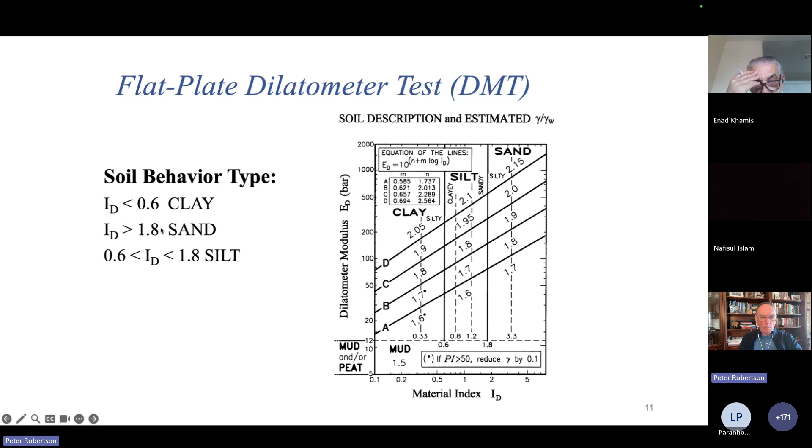And if it's between those two values, you're in silts. This is the sort of data you get nowadays from the seismic flat plate dilatometer. So you get a soil profile, and they've color coded it as we've progressed.

Now if we look at the cone penetration test, the advantage is it's fast and continuous. It's pushed in at 2 centimeters a second, basically 1 meter a minute. So you can do a 30-meter sounding in about an hour. It takes about 30 minutes to go down and 30 minutes to come out and get ready to move to the next site.

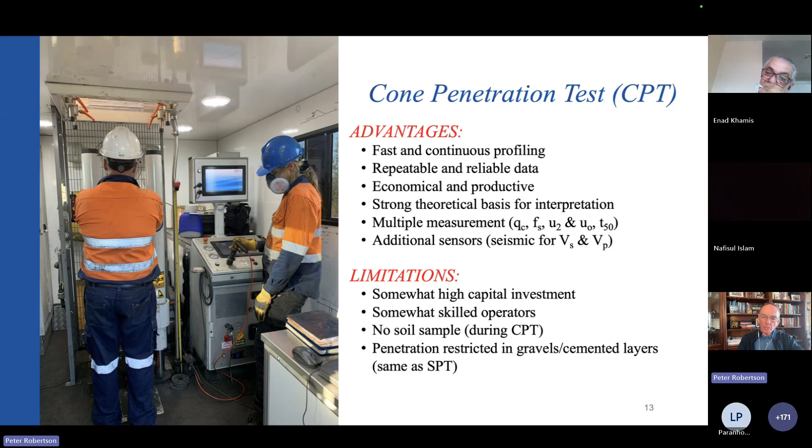You don't get a soil sample, just like with the DMT — at least not while you're pushing the CPT, but you'll see that you can use the pushing equipment to push in samplers and get soil samples. And of course you've got restricted penetration in gravels and cemented layers, just like the other penetration tests do.

So the common misperception is often that the problem with the CPT is you don't get a soil sample. And that's true — while you're doing the CPT, you don't get a soil sample. But in the early days of the development of the CPT, particularly in Holland, where it first originated, they have soft soils there.

People often think this must be quite slow because you're pushing the cone in at 2 centimeters a second. But when you're taking samples, you can push in as fast as the equipment can go, and with modern CPT trucks, you can push in 10 to 20 times faster. So you can actually get samples pretty quickly.

The common and preferred practice is that you push the CPT at a given location, and once you've got the profile, you move over about 1 meter and go down with these push-in samplers, taking a small number of selected samples. You look at the profile from the CPT, and depending on the geology and type of project—which layers are most important—you move over and push down the sampler to take selective samples in those layers.

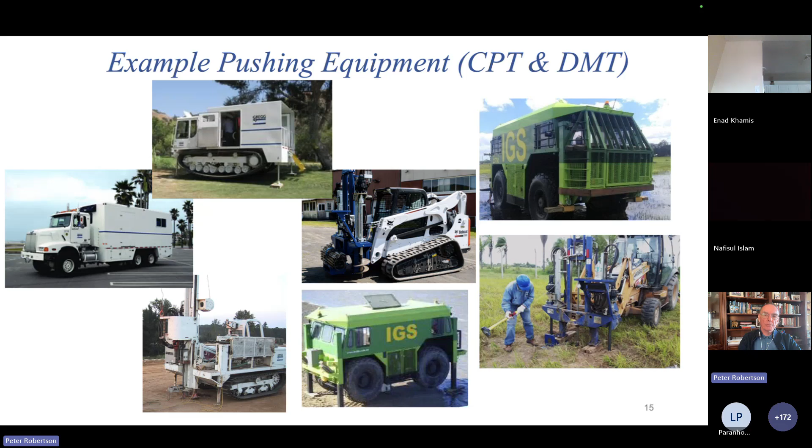I don't have a slide here, but one of the manufacturers of sonic equipment developed a little hydraulic ram set that would fit in the jaws of the sonic rig. So before doing the sonic drilling, as long as the geology was suitable, you would put the CPT ram set into the jaws of the sonic rig and do static CPT from that location. When finished, you move the hydraulic ram set out of the way and do sonic drilling right over the same hole where you just pushed the CPT, getting a continuous core of the material. So sonic is now becoming a very popular way of combining CPT plus drilling and sampling.

Often the question people ask is, how deep can I push the CPT? And that's true for how deep can I push the flat plate dilatometer as well. It depends on the reaction force you have, and also on how hard the ground is and the amount of rod friction.

If you just take a steel rod and push it into the ground, very quickly you accumulate a lot of friction on the side of the rod, and you will meet refusal because of the growth of rod friction. So standard practice in the CPT world: when pushing a cone in the early days, the cone was 10 square centimeters in cross-sectional area, about 37 millimeters in diameter. About half a meter back from the cone there would be a bump in the rod, which pushed the soil away from the push rods to reduce rod friction. That bump was referred to as a friction reducer.

But here in North America, 15 square centimeter cones have become very popular. They're 44 millimeters in diameter, and they're also accepted in the ASTM standard, which accepts both 10 and 15 square centimeter cones. The advantage of the 15 square centimeter cone is that it's already larger than the 10 square centimeter push rods, so you don't need a friction reducer. It actually takes less push force to push in a 15 square centimeter cone than a 10 square centimeter one, because there's less rod friction and less distance between the cone and the smaller diameter rod.

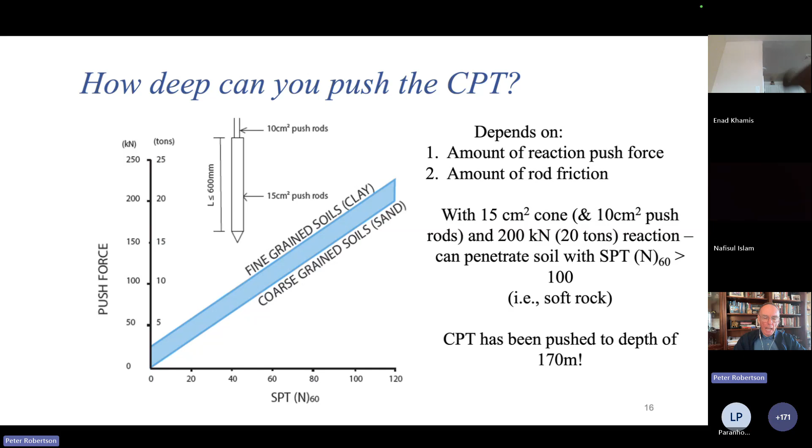So you can push the CPT a long way, providing you have adequate reaction force. Typically 15 to 20 tons is preferred, and of course a 25-ton truck gives you that immediately. But if you have smaller, lightweight equipment, that usually means you've got to anchor it down. Those smaller, lightweight pieces of equipment all had anchoring facilities where you could increase the reaction force by anchoring it down.

So what does the CPT measure? It obviously measures the depth, keeping track while you're pushing it in. It's got two load cells inside: one that measures the force on the tip, and when you divide that load by the cross-sectional area, you get the tip resistance, referred to as QC. The second load cell is attached to the sleeve, measuring the force of the soil as it passes the sleeve. The sleeve friction, or sleeve resistance, is that load divided by the surface area, so it's in units of stress. So you've got tip and sleeve in units of stress.

Usually there's a porous filter element, and the most common location is just behind the tip. In the early days it was on the tip, but it suffered a lot of damage, so now it's popular to put it just behind the tip—referred to as the U2 location, with U1 being on the face. You measure pore pressure in units of stress, so you've got tip, sleeve, and pore pressure all in units of stress.

Also, you measure the rate of penetration, since you're measuring depth and the computer acquisition system tracks time. So you track the rate, and the standard rate is 2 centimeters per second. And then most cones have simple inclinometers.

In the early days, just a very basic inclinometer. Nowadays, pretty sophisticated inclinometers in both X and Y direction, so you can keep track if the cone is not going vertical. Also, most cones now have temperature sensors, used primarily to make a temperature correction to the load cell.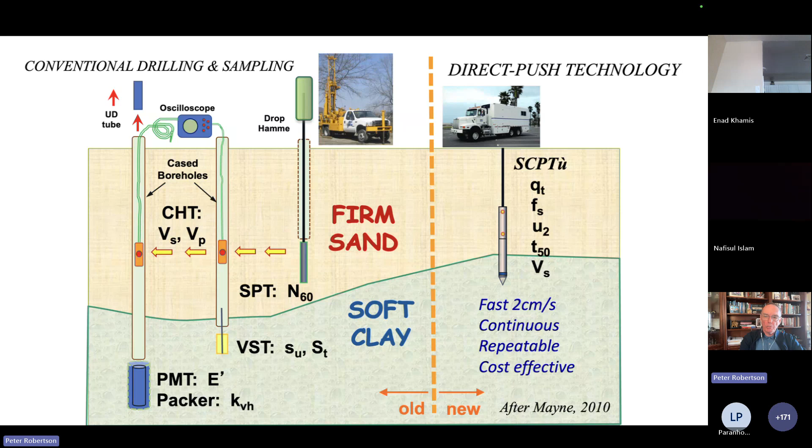Based on that, I do CPTs, get continuous profiles, and do dissipation tests to get groundwater conditions, etc. If it's a high enough risk project, I would then follow up with boreholes—a small number of selective boreholes in locations where ground conditions are most critical for the project, focusing on getting high quality samples for future laboratory testing. That tends to be where the industry is going.

When it comes to CPT interpretation, here's a visual. I've got these measurements from the cone, and I can get the soil profile, which is usually the first thing, and that's what we're going to talk about mostly today. But I can also estimate the state of the soil, either in terms of relative density or state parameter for sand, or OCR for clays. And then I can get the strength and stiffness—the peak drained friction angle, or the undrained strength for clays and remolded undrained strength.

I can get the modulus from shear wave velocity, so I've essentially got the stress strain curve. And if it's a clay, I can get stress history and compressibility. When I do dissipation tests, the time for 50% dissipation is a measure of the rate of dissipation, which I can use to get the coefficient of consolidation and permeability. So I can get virtually everything I need from this in situ test.

For high-risk projects, it's nice if you can take selective, high-quality undisturbed samples, do the relevant lab testing, and then compare the lab samples with the CPT to check if the interpretation is valid and whether any adjustments need to be made for your particular geology.

When it comes to classification systems, the traditional one, as Ken touched on, is based on physical characteristics. Here in North America, the Unified Soil Classification System is the most popular, but all the systems around the world are very similar. For coarse-grained soils, it's based on grain size distribution, and for fine-grained soil, it's based on plasticity. So coarse-grained soils is more than 50% retained on the number 200 sieve, or greater than 75 microns. Fine-grained soils is less than 50% retained on the 200 sieve. Then you look at how plastic it is, high or low plastic, etc.

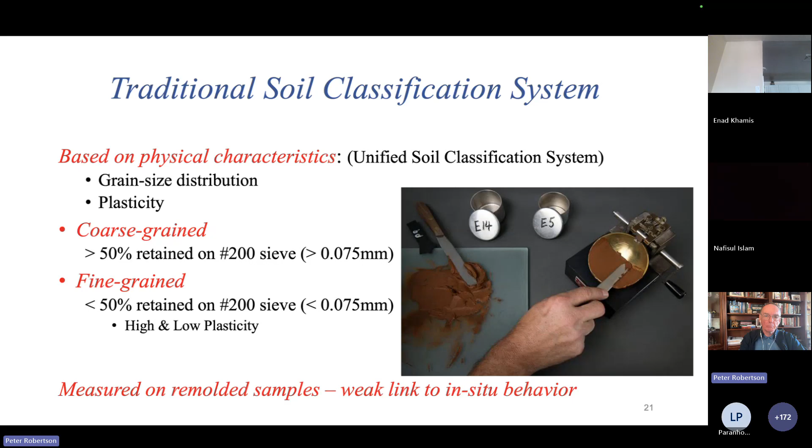Now, if the water content is close to the plastic limit, it's likely to be a stiffer, over-consolidated soil and much stronger. So Atterberg limits and moisture contents are valuable to get. But when it comes to in situ testing, they don't measure grain size distribution and plasticity directly.

The CPT, for example, is based on the strength, stiffness, and compressibility. When you push the CPT in, you're having to fail the soil to push the probe in, so it's obviously a direct measurement of the strength of the soil. The stiffness of the soil plays a role as well, the stiffer the soil, the higher the cone resistance. And it's also influenced by compressibility, so organics are very compressible, and some sands can be very compressible too.

The Dutch, when they first developed the CPT, realized they could identify the type of soil primarily based on the cone resistance and the slope of the sleeve friction to the cone resistance. So they developed this parameter called friction ratio, which is basically the sleeve resistance divided by the tip resistance in percent, the relative friction, how much the sleeve friction is relative to the tip.

In the early 80s, this sort of chart became very popular: tip resistance on a log scale from 1 to 1,000 atmospheres, and friction ratio also on a log scale from a very small number of 0.1% out to about 10%.

Most data fits within this region. Very rarely does it fall outside. So we identify sort of 9 zones, and clays tend to fit in the bottom right-hand corner, so they tend to have low tip resistance and high friction ratio, while sands tend to have higher tip resistance and lower friction ratio.

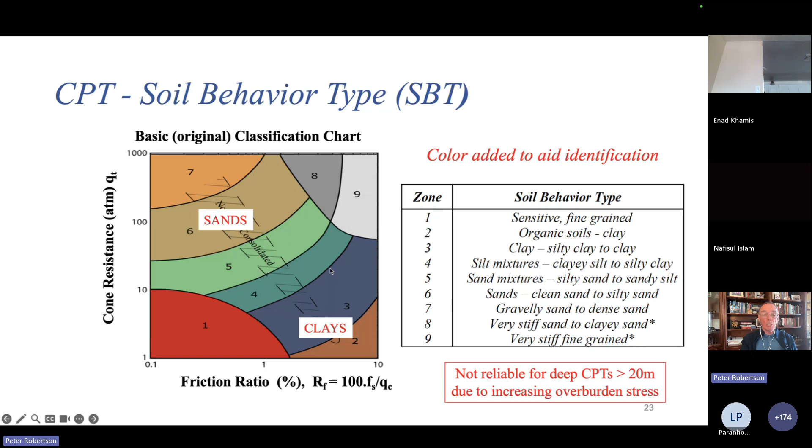But if it's normally consolidated, the deeper you go, the larger the undrained strength is, since the undrained strength ratio is roughly constant. So the deeper you go, the bigger the undrained strength gets, and the higher the tip resistance gets. So the data will keep migrating upwards in the chart, and eventually, if you go deep enough, you start to get the classification incorrect.

But in the early days, we recognized that when you lowered the cone in water, particularly for offshore work, it didn't always measure the correct water pressure on the tip. That's because the O-ring seals are inside by the sleeve friction, and water gets in behind the shoulder of the cone. So the net area of the cone, when there's water, is smaller than the gross area, and there's a small correction for that unequal end area effect.

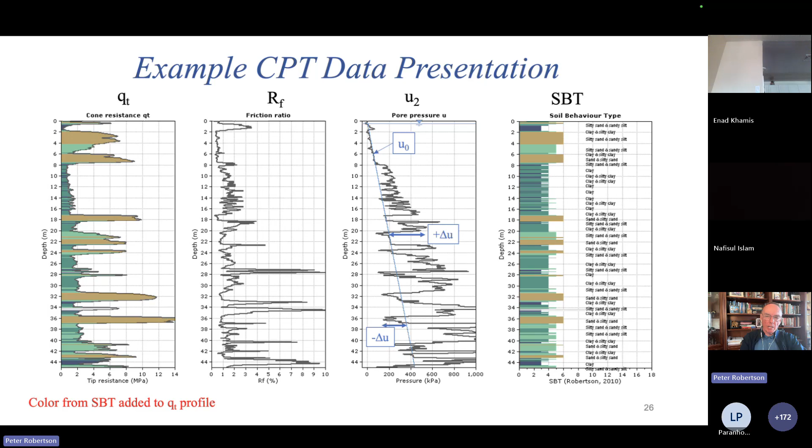I forgot to mention that because the CPT responds to behavioral characteristics, that's why we refer to the classification as a soil behavior type classification, not to be confused with the traditional classification from the unified classification system. In the early 1980s, Professor Wroth gave his Rankine lecture, and he said that ideally we should be normalizing the data for vertical effective stress.

He suggested that we should use a normalized cone resistance, which is the net cone resistance divided by the vertical effective stress, and then the normalized friction ratio is the sleeve resistance divided by the net cone resistance. It's a small detail, but normalizing with effective stress is important.

And then there were also these normalizations for pore pressure. Bq became the most common. This is the excess pore pressure, so the measured pore pressure minus the equilibrium, divided by the net cone resistance.

Then in 2009, I sort of said, well, Wroth was correct, but when it comes to sands, this linear normalization isn't quite right. So that made it a little bit more complicated. It's the net cone resistance divided by atmospheric pressure, so it becomes dimensionless, and then atmospheric pressure divided by vertical effective stress, to the power n.

In clays, n is 1, so it goes back to what Wroth had suggested based on clays. But in sands, n could be less than 1. For very dense sands, it could be as low as 0.4, and then eventually would move up to 1 in looser sands and at high confining pressure.

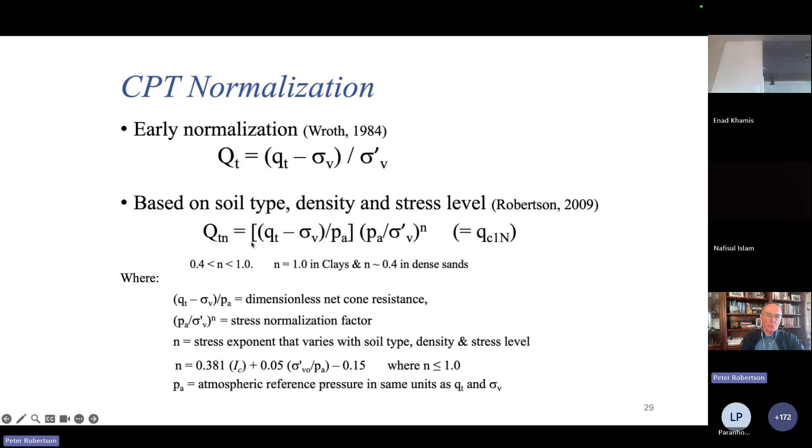I came up with a way of how you would estimate n, based on the soil type. It's an iterative process, but it only takes a couple of iterations to home in. Everything we're going to see now is this normalized cone resistance, normalized with a stress exponent of n. In 2009, I updated the charts.

Actually, I updated them in 1990, but then again in 2009. So here's the 2009 version. You've got normalized cone resistance on a vertical scale, again over 3 orders of magnitude, and then normalized friction ratio.

Sands tend to fit in the upper left corner, clays in the lower right-hand corner. In sands, the penetration is predominantly drained, and in clays, the penetration is predominantly undrained. The soils in the middle, the mixed soils like the silty sands, silty clays, that's where partial drainage can occur.

Mike Jefferies and Mike Davies in Vancouver in the early 90s had a similar classification, with similar boundaries that were almost concentric circles. They came up with the clever idea that you could take an imaginary center of these concentric circles, and the radius of these circles would be an index of soil behavior. They refer to it as soil behavior type index, IC. It's just the radius of these concentric circles.

When IC is small, you're up in the sand region, and when IC is large, you're in the clay region. Since most data plots down the middle of the chart, IC works really quite well. IC is around 2 or less in sands, and usually greater than 3 in clays. The boundary between the two is roughly 2.6.

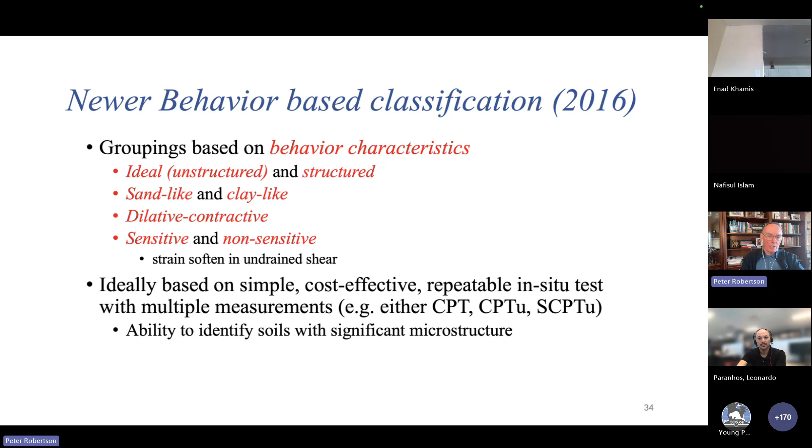If it's dilative at large strain, the undrained strength is going to be larger than the drained strength. So knowing if a soil is contractive or dilative gives you a sense of whether to use undrained strength or drained strength. If it's dilative, typically you use drained strength because that's lower than the undrained strength. But if it's contractive, you typically want to check the undrained strength because that's lower than the drained strength. And last of all, you want to know: is the soil sensitive? Is there a risk that it's strain softening, and could you get remolded strengths significantly smaller than the peak strength? So those are the behavior classifications.

That's what we try to do.

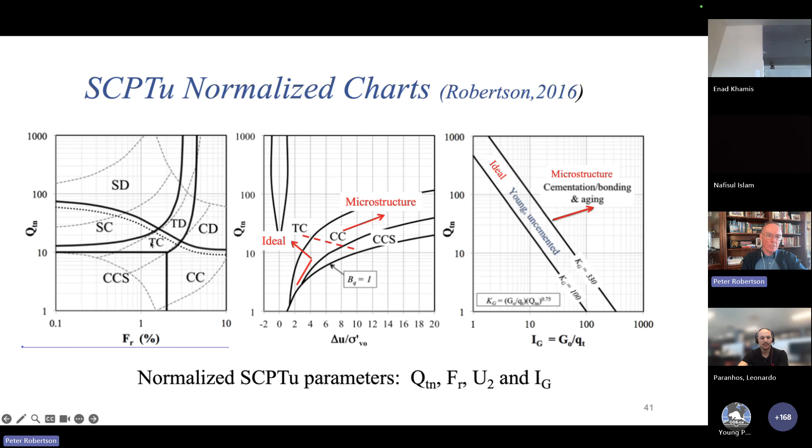The dashed lines are the traditional boundaries, and the solid lines recognize that these concentric circles weren't quite right, so we moved to a hyperbolic shape. Here's a color-coded version: you've got sand-like material, both contractive and dilative, clay-like material, contractive and dilative, and then sensitive clay-like. In the middle, you've got transitional material that could be contractive or dilative. So you end up getting a more detailed profile, the same profile but now with these newer parameters.

Let me just finish off. Professor Jonathan Bray once said to me that this soil behavior type chart is a bit like a Rosetta Stone of soil behavior.

So I'm going to quickly zip through some main things. Here's the basic soil behavior type chart. If you know there's little or no microstructure, the chart works really quite well — that boundary of contractive-dilative works very well as long as there's little or no microstructure. We know, for example, that increasing unit weight tends to move up and to the right, and decreasing permeability and increasing fines content goes down the middle and down to the right. Of course, sands have high permeability and small fines content, while clays have low permeability and high fines content. Here are the correlations that were developed to help you get that — you can estimate the unit weight, permeability, and fines content.

If you're in the sand-like region, the upper left, we know that as you go up and to the right, you get increasing relative density, decreasing state parameter, and increasing peak friction angle. Here's the correlations for them — they're all based on clean sand equivalent, which is just the measured normalized cone resistance with a correction factor that's a function of IC. So basically, for this contractive-dilative boundary, if you've got a silty sand right in the middle of the chart, that's equivalent to a clean sand up and to the left — that's what the clean sand equivalent correction is.

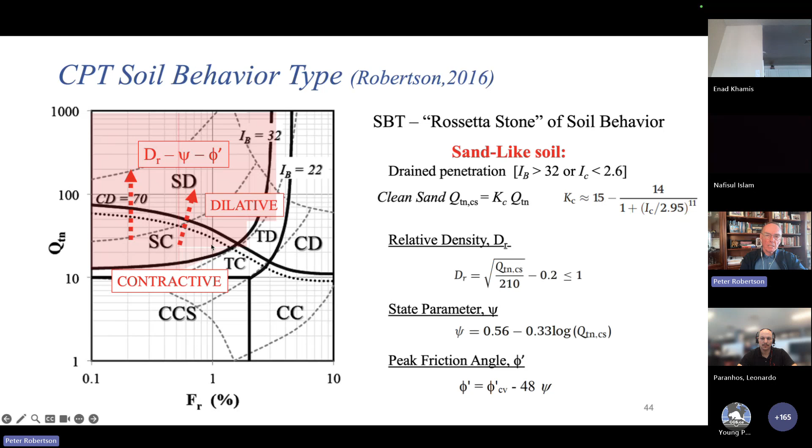If you're in clay-like materials, the bottom right-hand corner, a normally consolidated insensitive clay would plot where those two red lines are joining. Increasing OCR tends to move vertically up, and increasing sensitivity moves to the left. Depending on where the data plots on the chart, you get a pretty good idea of what the material is. Here's the relationship for OCR, undrained strength ratio, and remolded undrained strength ratio.

Then there's microstructure: this contractive-dilative boundary works for soils with little or no microstructure. With increasing microstructure, that boundary moves up the chart. In other words, you can have data that plots what appears to be in the dilative region, but in fact is contractive because that boundary is moving up. One way you often see that in real data is that the tip resistance might suggest a very stiff material with a high OCR, but the pore pressures are strongly positive.

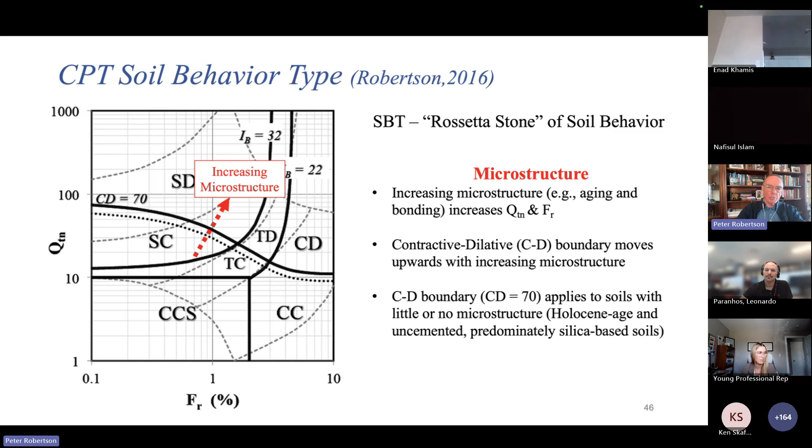Strongly positive, which means it's contractive. So the tip is saying it's over-consolidated and should be dilative, but the pore pressure is saying it's contractive. And that's because of that microstructure.

You can do dissipation tests to get equilibrium and rate of dissipation. Here's an example, pore pressure against time. You pull off the T50 value—here it's 160 seconds—and you get the equilibrium pore pressure. Then there's a chart that takes the T50 to give you the coefficient of consolidation, and then the T50 to give you permeability. Notice one is in minutes, one is in seconds.

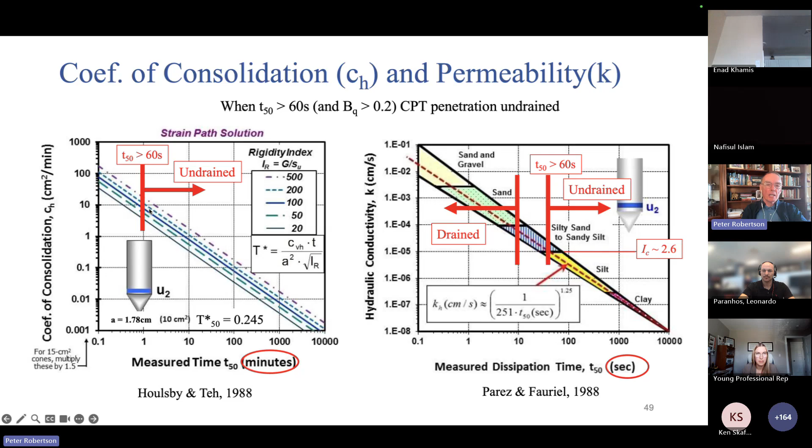I've added in the range where soil is undrained or drained, so roughly 60 seconds. So if T50 is greater than 60 seconds, the penetration is essentially undrained.

Here I wanted to show an example—it's quite common that people tend to say, well, I need to know where the groundwater is. You do need to know where the phreatic surface is, but you also need to know what the piezometric profile is. It's not always hydrostatic. If there's downward flow, the piezometric profile will be less than hydrostatic, and if there's upward flow, it will be greater than hydrostatic.

Doing frequent dissipation tests and getting equilibrium allows you to know the groundwater conditions. Ken talked about examples where excavations would blow out due to high water pressure underneath the excavation. So if you do CPT and dissipation tests, you can anticipate these high pore pressures.

So to close out, key points: SPT is generally not very reliable—avoid if possible. Ken said for low risk projects it's okay, but nowadays with increasing availability of CPT, why not just do CPT? You're going to get much better data, and it's actually cheaper if it's readily available.

CPT has excellent reliability, provides near continuous profiles with multiple measurements—you need to follow the standard. CPT can be carried out in essentially all the same soils as SPT, but you get a lot more data. The DMT is useful, but it's a bit more expensive, slower, and gives you less data than the CPT. So the DMT tends to be used in companion to the CPT, on large, high-risk projects.

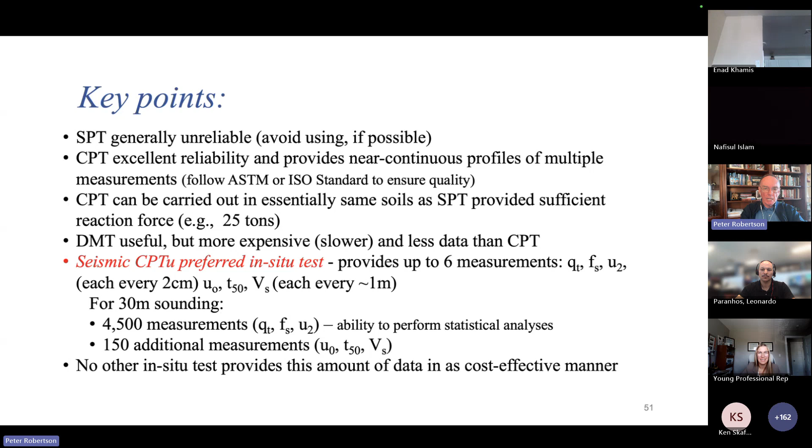Now, I know I went by quickly, but the slides are available on the server to download and look at in your leisure. As they said in the introduction, I've had this CPT guide around for about 20 years, so it's on the 7th edition now. It's free at a number of different websites, and I've also got webinars that are freely available.

Professor Paul Mayne, in collaboration with ConeTec, has a similar manual. Paul's is a little different—he's focusing more on parameters, but the two together are very valuable. Mine tends to be shorter and more concise; Paul is more detailed, but Paul has a lot of good examples in there, so both are very, very useful.

So sorry if I rushed it a little bit near the end, but happy to take any questions.

Thank you so much, Dr. Robertson. That was a fantastic presentation—great to see the background behind the science of these charts and how we can predict some behaviors, some parameters of the soil.

So leading up to questions, we have one here just on one of your last points about dissipation, and it's about application in tailings. To what extent are dissipation tests reliable in tailings, particularly when partial saturation leads to non-monotonic dissipation curves and atypical pore pressure responses that are difficult to interpret?

Yeah, that question touches on a couple of things because you say partial saturation. So first of all, ideally, of course, the cone needs to be saturated.